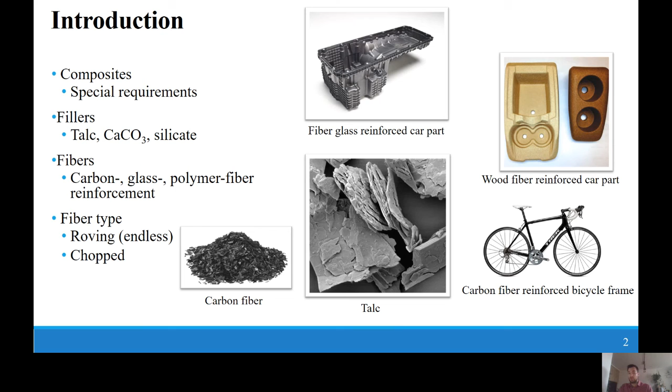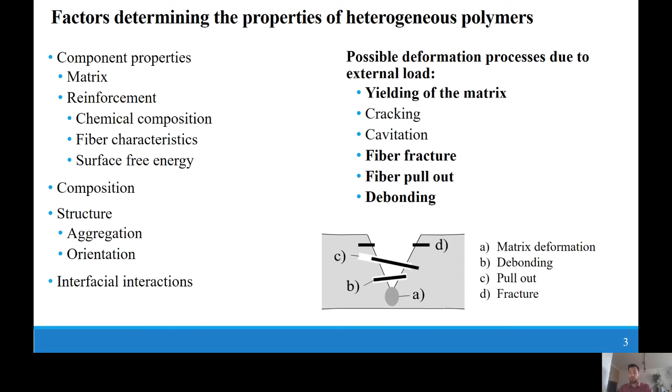The properties of all heterogeneous polymers are determined by the same four factors: component properties, composition, structure, and interfacial interactions. All four are equally important in determining composite properties. In order to achieve optimum performance and economics, these factors must be optimized. Under the effect of external load, heterogeneities induce stress concentration. Micromechanical deformation processes may occur in the composites prepared. These processes can be energy absorbing mechanisms, which are very important in improving impact resistance.

The aim of this study was to determine the effect of polymeric fibers on impact resistance of three-component hybrid PP materials and the identification of deformation and failure mechanisms occurring during deformation. Impact resistance is usually increased by the addition of elastomers. However, this method of modification decreases the stiffness of the material to below 1 gigapascal at large elastomer content, which is not accepted in many applications.

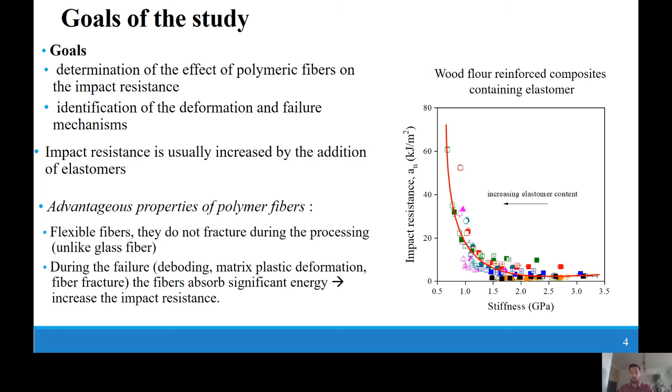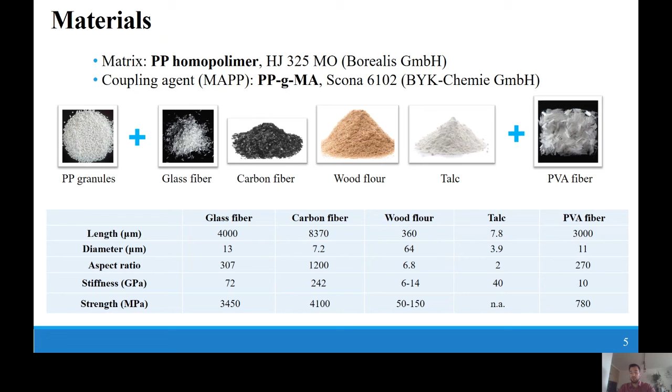The components, the fiber and the matrix polymer were homogenized in a twin screw compounder. PVA fibers were dried before extrusion at 80 Celsius degrees for 4 hours in a vacuum oven. Extrusion was repeated once in order to increase the homogeneity. The granulated composites were injection molded into standard tensile bars. The specimens were stored at ambient temperature for 1 week before further testing.

The mechanical properties of the composites were characterized by tensile and impact testing. The structure of the composites and deformation mechanism were studied by scanning electron microscopy, by recording micrographs on fracture surfaces created during tensile and fracture testing, respectively, and acoustic emission measurements as well.

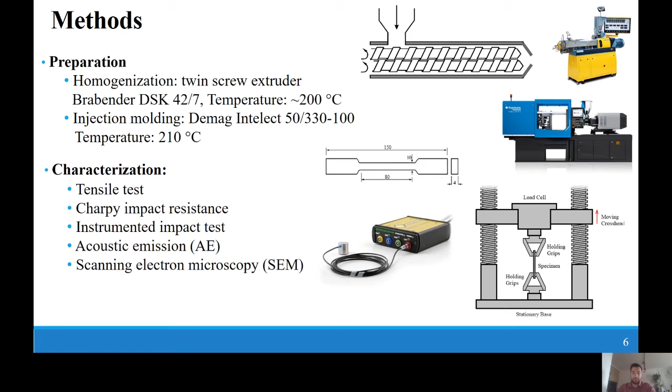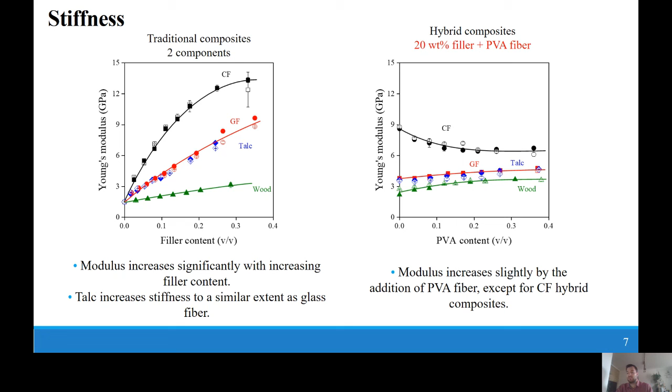In the case of hybrid composites, right side, the stiffness increases slightly with the PVA fiber content, except in the case of carbon fiber composites, where the debonding of the polymer fibers is assumed even at small deformations. Furthermore, it can be seen in the figure that the effect of the coupling agent is negligible.

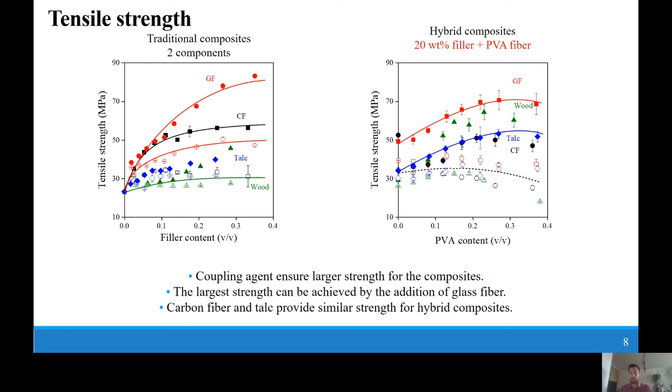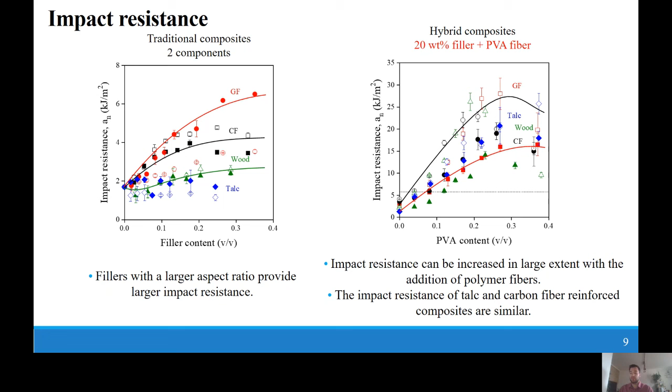The largest impact resistance was achieved without the use of coupling agent in the case of glass fiber reinforced hybrid composites, which was 30 kilojoule per square meter. This value is already very favorable for the industry. It's worth again drawing attention to the fact that talc PVA composites have a similar impact resistance as carbon fiber reinforced PVA hybrid composites. It is important because the price of the fillers is very different.

Okay, instrumented impact test was also performed on the composites prepared. In this way, we can determine not only the energy absorbed during the fracture, but also the nature of the fracture. The figure on the left shows the force-time curves of two-component composites containing different amounts of talc. As the amount of talc increases, the force required to initiate cracking also increases. The area under the curve is related to the amount of energy absorbed during the failure.

When the maximum force is reached, the crack passes rapidly through the cross-section of the specimen. The nature of the fracture in this case is brittle. In the case of hybrid composite, as the PVA fiber content increases, the force required to initiate the crack increases. The crack does not move momentarily, and the flexible polymer fibers hinder the rapid propagation of the crack. The nature of the fracture is tough, even at low PVA fiber content.

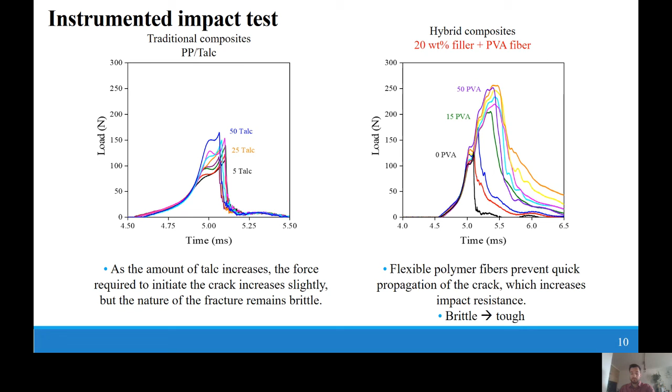In parallel with the tensile test, we also performed acoustic emission measurements. On the slide, the stress versus strain curves and the cumulative number of signals are visible. Each blue symbol indicates individual events that occur during deformation, the source of each signal being some kind of micromechanical deformation process. The location and distribution of the symbols on the figure include a lot of information, and it is difficult to interpret. So we created a cumulative number of signals.

This is the black solid line in the figure, which sums up the number of individual events up to a given deformation. The shape of the curves and the number of signals can provide information about what was the dominant deformation process. In the case of carbon fiber composite, the process takes place at small deformation. This process is the fracture and the pull-out of the fibers. The number of signals is around 20,000. Negligible amount of signal is detected in the talc reinforced composites due to the fact that the small particles don't give a signal which can be detected by acoustic emission method during the debonding.

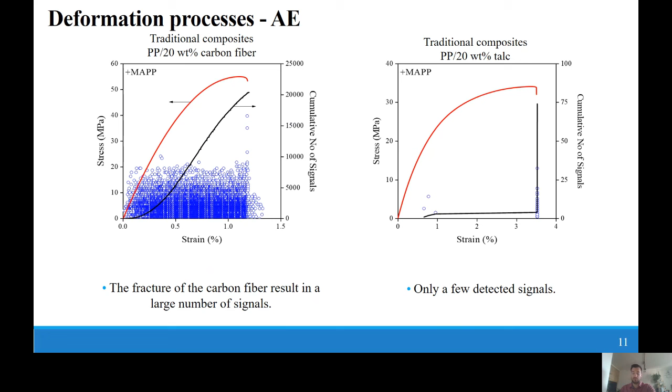On the next slide, I will present the acoustic results of the hybrid composite of the composition shown here. Yes, so for hybrid composites, a much larger number of signals was detected because of the PVA fibers. In the case of carbon fiber PVA hybrid composites, two different processes can be defined. At small deformations, the fracture and the pull-out of the fibers can be observed, while before the failure, the fracture of fibers is the dominant deformation process. In the case of talc PVA hybrids, no signals were detected at small deformations. Before the failure, similarly to the carbon fiber composites, the fracture of the PVA fibers gives signals.

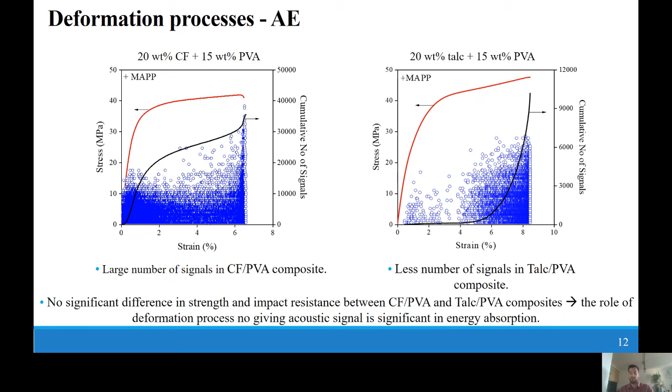As we have seen before, no significant difference was observed in the strength and impact resistance of carbon fiber PVA and talc PVA hybrid composites, but the mechanisms of the failure are different, as we can see here and on the next slide. This observation is also proved by the presence or absence of acoustic emission signals. However, these different processes absorb almost the same amount of energy.

So in order to identify the deformation processes occurring during the failure, images were taken of the fracture surface of the composite using a scanning electron microscope. In both carbon fiber PVA and talc PVA composites, the fracture and the pull-out of the PVA fibers is visible. In the case of carbon fiber composites, the fracture and pull-out of the fibers can be seen, while in the case of talc reinforced composites, the debonding of the talc and the plastic deformation of the matrix around the talc particles is visible. These local deformation processes consume more or less the same energy during the failure, as we saw from the previous slides.

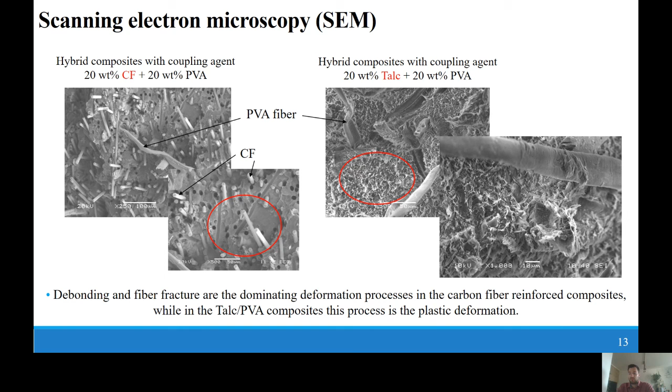I mentioned at the beginning of my presentation that our goal is to prepare composites that have both large impact resistance and stiffness. In the figure on the left, the impact resistance of traditional composites can be seen as a function of stiffness. It's visible that large impact resistance could not be achieved with these composites. The figure on the right shows the results of the hybrid composite. With the addition of the polymer fibers, outstanding impact resistance was achieved.

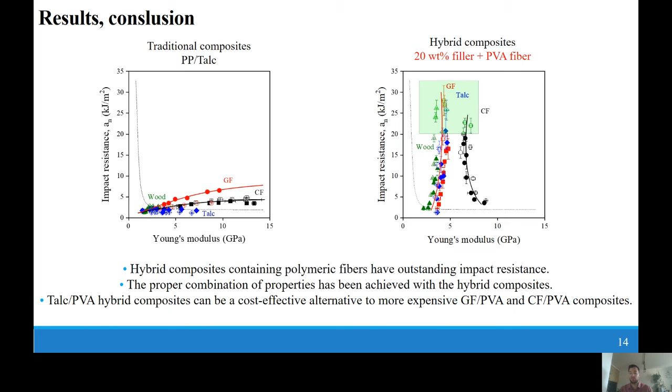The proper combination of stiffness and impact resistance has been achieved, and the results for talc PVA composites suggest that they could be a cost-effective alternative to the more expensive carbon fiber PVA and glass fiber PVA composites. We have found that sufficiently high impact resistance and stiffness can be achieved with different deformation mechanisms during failure.